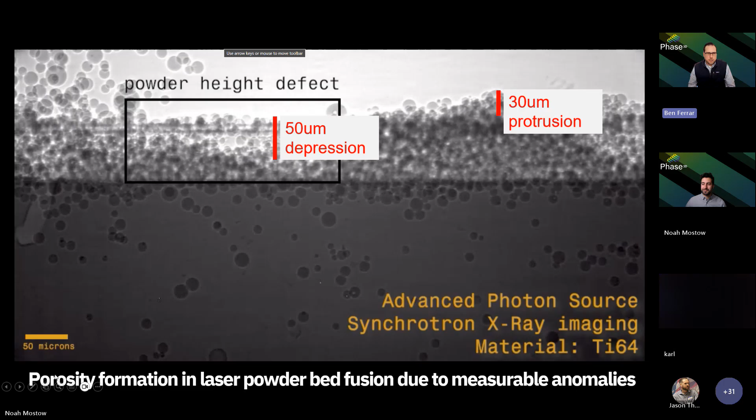So, when we look inside an AM machine, it's very easy. You don't need to play it again, Noah. You can click onto the next slide if you'd like. So when we look into an AM machine, it's very easy to see the laser moving, but you have to ask yourself the question, are we really seeing everything that's going on inside the build chamber?

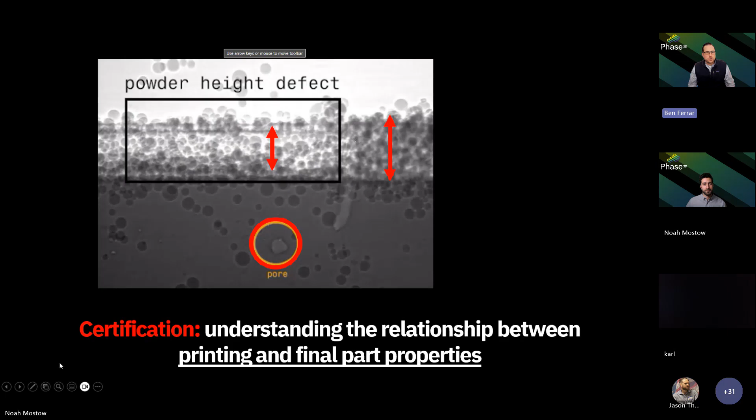And when an engineer sees either a part protruding out of the bed a tiny bit and it causing some small amount of streaking, what is the magnitude of that and what's the potential impact of it? And it's something that we've been working really hard on at Phase3D to really understand the relationship between what happens during the printing process and final part properties. So we'll discuss that in more detail as we go through the presentation today.

So firstly, let's take a big step back, right? If we think about where additive manufacturing is, and many of us that have been in the industry for a while have been saying it's in a pivotal phase, for what feels like a decade. But really, ultimately the applications that have won in the last 5 years and have fueled the start of the growth in production have been based on adoption of geometric freedom.

So a lot of heat exchangers or other cooling channels or fluid flow for aerospace and defense. And then in the medical industry, yes, we have the customization aspect, which has driven a lot of the growth, but also the unit cell structures that enable bone growth have really started to shape the growth. And you can see an image of an enlarged porous structure at the top.

And so when we ask ourselves the question, what do you need to be able to do during additive manufacturing to actually enable those really fine geometric structures and internal structures, you have to be able to ultimately validate what you've built, right? And so one of the things that we're really proud of our technology for is because we're taking measurements during the building cycle, we can actually validate that features have been built, measure features that are inside a structure that can't be measured any other way.

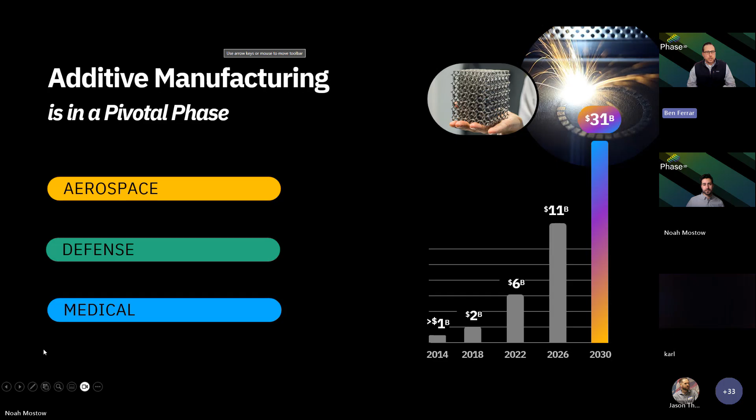And that's why we see so much CT scanning today in additive manufacturing for part validation. So we see this as the next step to unlocking the future in additive. If you want to move on, Noah.

So we talked a little bit about it from a geometric point of view, but let's think about it from a qualification or quality perspective. A lot of our customers today are seeing high scrap rates, and many of these things are caused by issues that are happening in the process that aren't necessarily repeatable build to build. So they might run a build once and they might see a certain number of anomalies in their layers or parts that start to flick up or protrude,

but really it's very, very hard for them to validate. And for us to make the big shift from the $6 billion market today to the production market in the future, we have to improve our quality standards. And to be able to do this, we have to be able to quantify what those standards are to get to production. I'm going to flick on. So, we see Phase3D's fringe inspection technology as critical in the future to enabling quality and ensuring reliability.

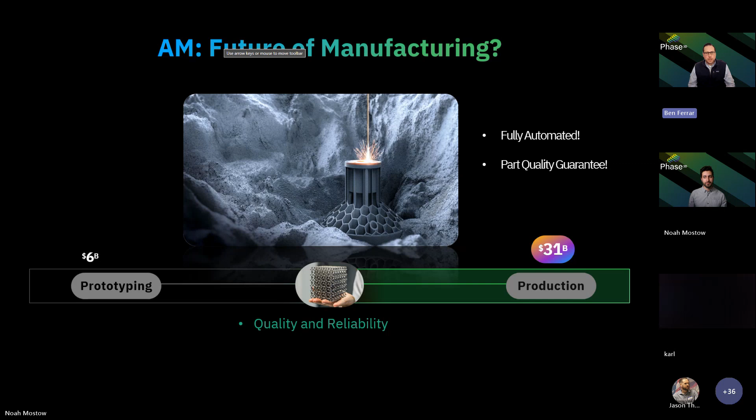When we think about how much data we take from a manufacturing process, today we're taking a huge amount of data before a build process and after a build process in terms of tensile bars, metallographic samples, and before we're doing a lot in terms of simulation and topology optimization on designs. But really the missing piece is what's going on in the build platform.

And there's a number of qualitative methods that are being used. People can look through images, but we see fringe inspection technology as being the first real method to quantify in process what's happening.

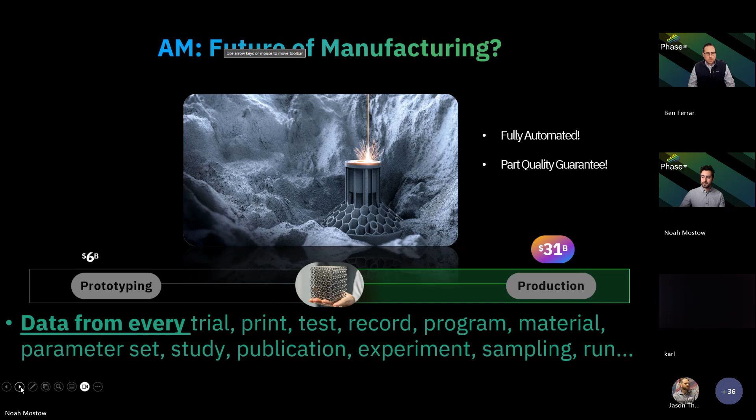So if we look at the cost of a build going wrong and you're not seeing it, and just to explain where we are today, right? Most OEMs who are manufacturing parts with a subcontractor or even internally will specify in their part spec that every layer of a build must be reviewed.

So you have all these engineers around the country and in these big print farms reviewing the most boring video of their life where they watch a build and they qualitatively say, oh, it looks like something's sticking up there, or it might be a streak, right? And ultimately then they have to get into a discussion. Okay, well, can we accept that, or is the part sticking up too far?

What this generally means is a lot of the time, they miss defects. So these things will happen during the printing process. The parts will continue on their route through a production facility, go through post-processing and inspection, which can be very expensive with heat treatments or HIPs or machining and post-inspections like CT scan.

And then when they get to the end of it, they have to restart the build because they've reviewed the movie, or they've eventually got to the point where they've figured out or agreed with their customer that the defect that they see is not acceptable.

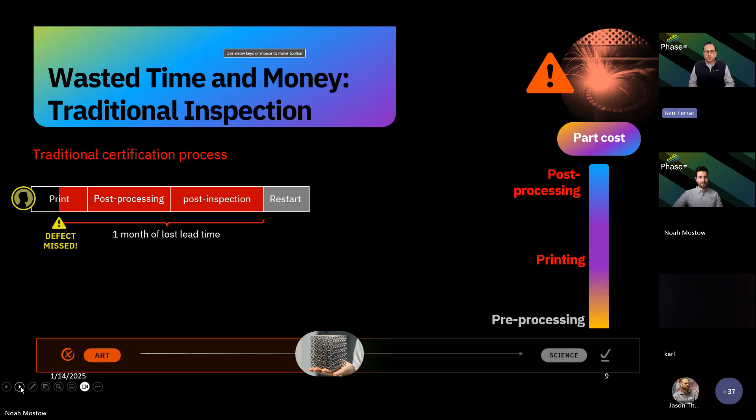What our technology allows is, during the build, because we're quantifying what's happening to the bed, our customers are able to set limits in terms of what they'll accept. So if they say, look, if there's a part sticking up over 200 microns, we know that we're not going to be able to accept this, so kill the build and restart. They save both the lead time and the cost, and these costs can be significant.

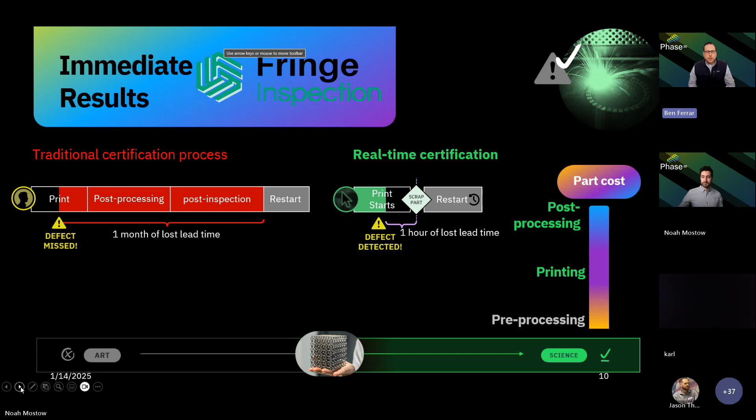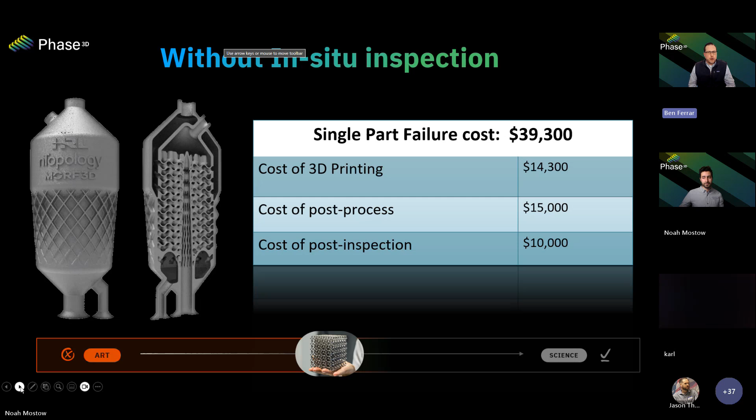So if you move on to the next slide, Noah, if we take a part like this example here, which is a heat exchanger, the 3D printing cost was about $14,000, and the total cost of post-processing and post-inspection was $25,000. So if you don't catch these defects or internal geometry issues early, you're liable for that cost. So with our technology, if you're able to save half the build time and all of that cost of post-processing, it's a significant improvement of COPQ, cost of poor quality.

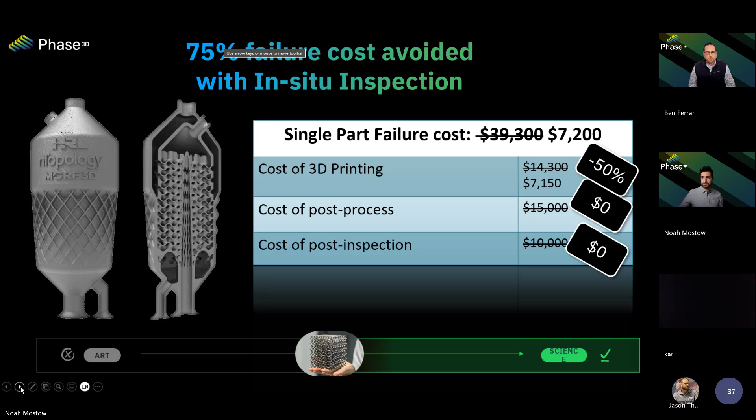Okay, so I talked briefly about all the information or data that we're gathering pre-print and what we're capturing post-print. And a lot of the data that we're capturing today during the print may be either really low resolution information or not really good leading indicators of what's happening in the process, things like oxygen content or temperature or other environmental conditions. But with our technology, we enable that quantifiable data to be created during the print.

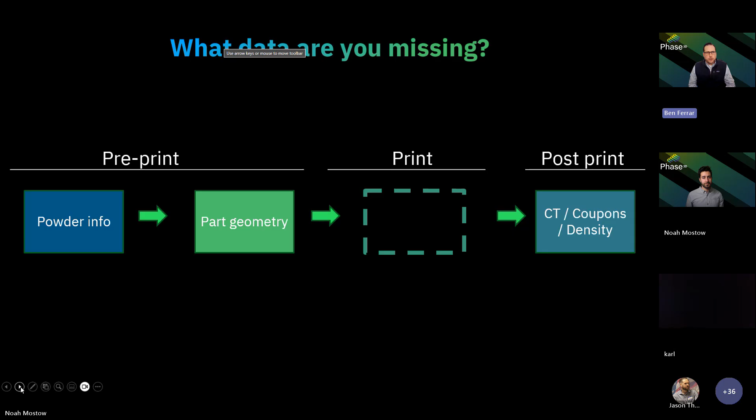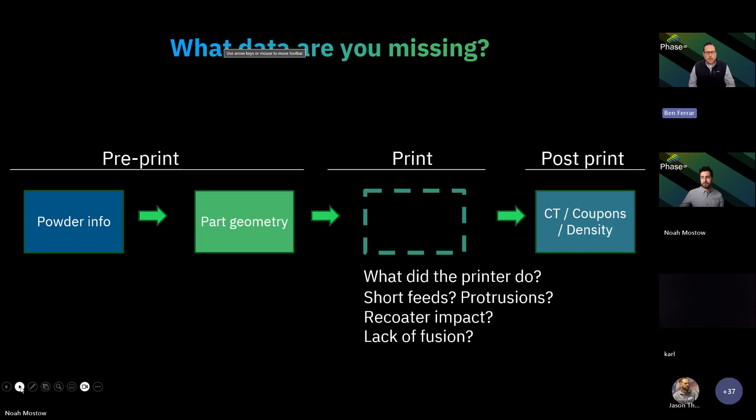So Noah, if you want to click on. So we can start to understand, okay, well, what did the printer do? Were there short feeds? Were there protrusions? Was there recoater impact? Was there any lack of fusion? All of which our technology has the capability to do in the future. It really becomes a question of resolution and time, right? How long do we want to take taking the measurement?

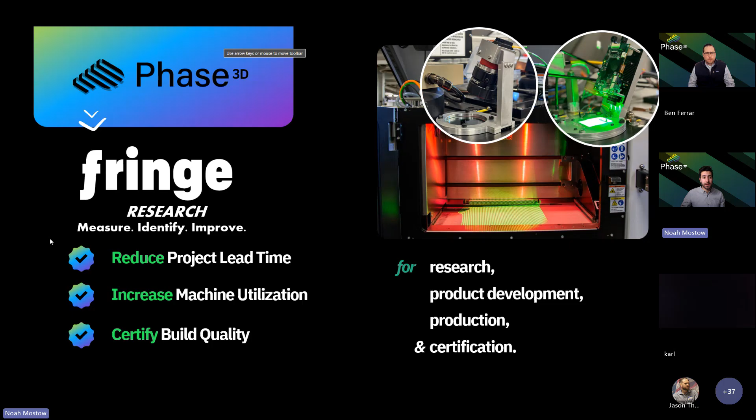So with that, I'll hand over to Noah to talk to you in a bit more detail about our products and how they work, and give you a demonstration of the software. Yeah, so thanks, Ben. Today I'm going to really focus on what we're doing and how this can impact you all within either your facility or the customers that you work with. I'm going to pass through those slides. Ben, I think those are still yours, but I think you covered all the topics.

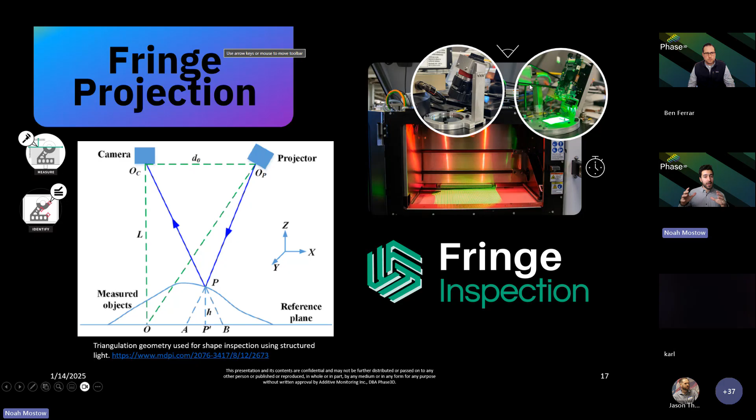So at Phase3D, our product, Fringe Inspection, really is based around fringe projection. Now, many of you today probably have seen 3D scanners, whether it's walking through your facility or walking through an event every single year. Our technology, Fringe Inspection, is based off of what is happening within the machine using fringe projection. So what we do is we mount a camera and a projector outside of the build chamber, and then within it, we're projecting a fringe pattern, which is basically a sinusoidal wave that identifies where there's a variation.

Now, we're not going to get into the mathematics of fringe projection today. If you are interested, I can send you a lot of really fun scientific papers about how our technology is working and the backbone to it. But what you need to know is basically how our eyes work. It's very similar. We have a distance between them, and what we're looking at is a variation. That's how we can tell depth. So our technology itself does this in really quick time for the entire build area.

So we can go into the math around how it's doing, but what you need to know is the camera and projector are working together, and then we have a calibration surface that is based during setup and then routinely updated so that everything is uniform. And what you're seeing here for this shape popping out, this is really what you can see. When you're looking into the build with a fringe pattern, you're able to see variations because we're making and controlling a line or wave. That is what allows us to take that measurement. And this is different than any other in-situ monitoring technology in the industry. And that's really why we consider ourselves inspection, because we're quantifying it.

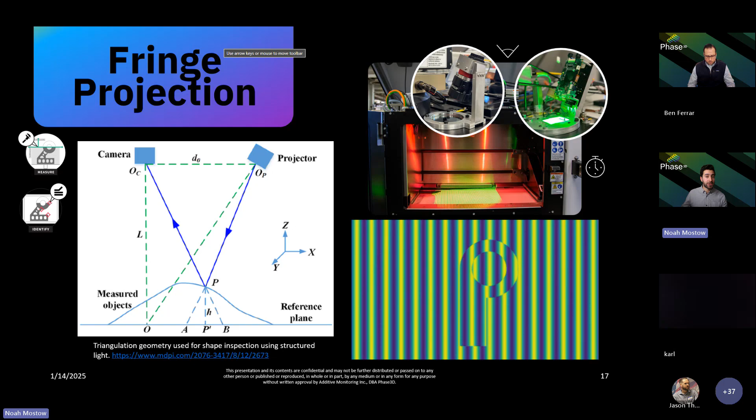So what does this mean? Now, many of you today probably have seen build images, or if you've looked into a metal 3D printer, it's a relatively flat surface. And what you're looking for in the visual spectrum is a shadow to identify a problem. This isn't good because really it's subjective. We can go back and forth all day and argue about what does this mean.

This is a hatch pattern, but is this something that we should fail the build for? What we do at Phase3D, and what our output is, is a height map. So every single pixel is a measurement and we're quantifying what's happening. So now we're able to create thresholds that cause build failure, and we're able to know and tell our customers what to do based off of a unit measurement.

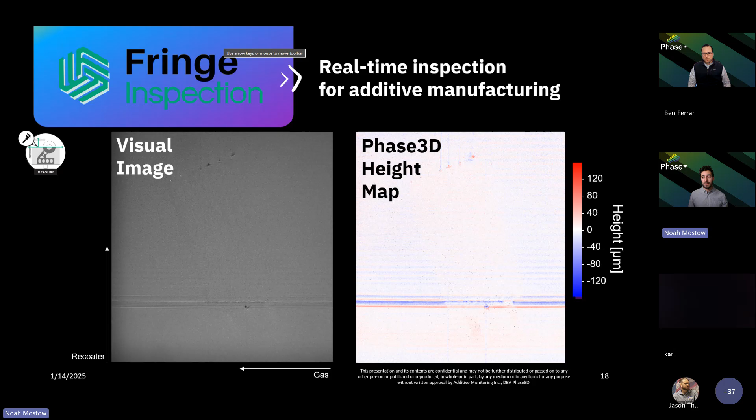Now today this can look like root cause analysis for build failure, which we'll get into, all the way into failing parts. In the future, where we see ourselves is a certification technology. Now this is because we're able to quantify. And even beyond that, our core technology has these kind of 5 pieces. So we're not using artificial intelligence or machine learning to identify these anomalies.

Now, many of you on this call probably have used ChatGPT or Claude or whatever AI model to write an email. That's great, but that's not an inspection technology. We can't trust a black box to say that this part is good because we don't really know what's happening. For my background, I'm an engineer. So I've created neural networks when I was at the Colorado School of Mines, and having created them, let me just say, you can't trust them completely.

And because we have that unit-based, repeatable, calibratable, known uncertainty measurement as the backbone to our technology, we're able to really understand what's happening and make decisions using really objective measurements. And this is where we differentiate ourselves from others in the industry, because you're not questioning, is this a protrusion of X amount out of the build? We know, and we can tell you why we know it.

So our technology, fringe inspection, takes 3 measurements per layer. So what does this look like really when you're running a build? We take a measurement after the powder is spread. We take a measurement after the powder is melted. And then we also take a measurement after the build area repositions itself. Now this allows us to quantify exactly how much powder is spread across your entire build area.

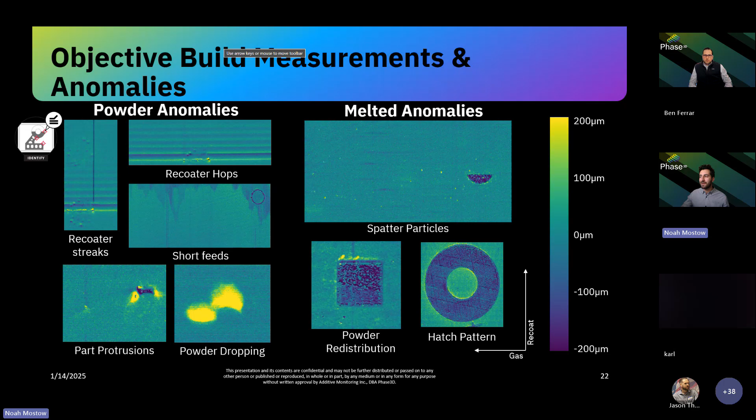But let's start to talk about what you actually do with this. So this slide here is telling you a little bit of a story. What we've done with our customers when they really adopt our technology is the goal here is to be able to stop a build. So what we'll run through is a design of experiments where we're printing parts that have anomalies that are going to impact the part, measuring the entire process as we've discussed, identifying what defect or flaw occurs within the part, and then we want to control the entire process.

Now, this is all dependent off of your specification. So whether you're looking at CT scanning or you want to be doing fatigue testing, tensile bar testing, this anomaly to defect is really that key challenge. So how do we correlate the two is some of the work that we're doing on a day-to-day basis to be able to understand what is really causing the part to fail.

Now, I'm going to be upfront with you. I would love to be able to say, this anomaly causes this part to fail inspection. But that's not how additive works. If you're printing bottle openers, you can have all the anomalies that you want. All that you care about is does it open the bottle at the end of the day? But if you're printing a part that's going on to an aircraft that's spinning, you have a lot higher specifications and even different specifications per region.

So that's where we can start to do this work and create different build profiles. And really what we're looking at here is improving the process based off of that profile. So what is a go, no-go criteria? Because at the end of the day, we're manufacturing. And this is a key piece to know: we can't be continuing to look at this as, I have 30 years of experience and can listen to the machine and know what's going wrong. No, we need to be quantifying. And that's what our technology is doing.

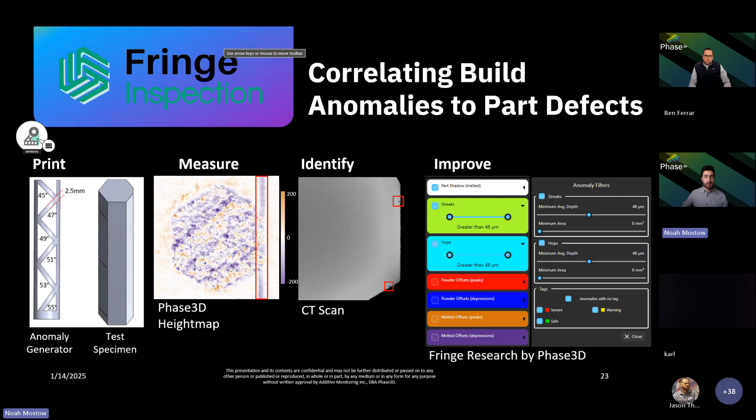So some of the work that we can publish here about these correlations is for the US Air Force, which was done on an EOS M290 using Ti-64, as well as for NASA using GRCop on an Colibrium Additive M2. Now you can see a high correlation for both of these studies from the anomalies to CT detected defects.

But also we were able to see that a 50 micron anomaly depression led to a pore that was detected in the part, which we need to continue to do additional studies on, and this is what we're doing with customers to know whether this is universal. We do see this at other customer sites, but for each different parameter set and material supplier, we want to make sure that everything is happening correctly.

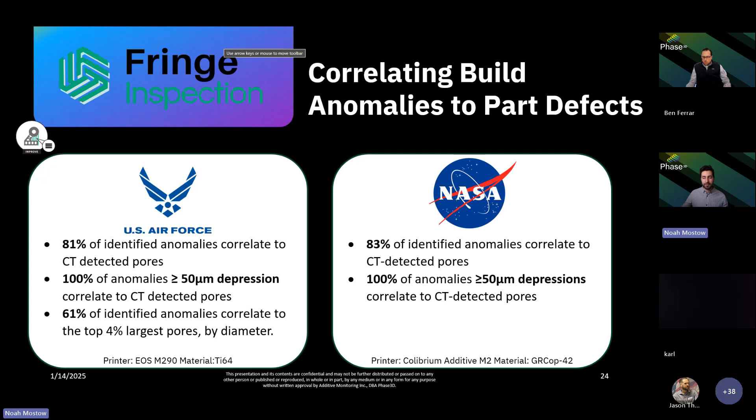We need, in our mind, to be able to have anyone who comes on site be able to run the machine, know when to stop it, and then be able to provide educated information on that part all the way through the process chain. And that's how we reach born certification, is by knowing what's happening in the machine itself.

Now I'm going to get into it in a second, but what I want to describe is our product suite. So Fringe Inspection is really what our product is, and it allows you to take the measurement. Then we have two options here. We can either get into Fringe Operator, which is your analysis and data visualization, which I'll show in a second. And then we have Fringe Qualification. This was released here at Formnext, and this is your high-level overview of the data that you're gathering at your facility to know what's going on.

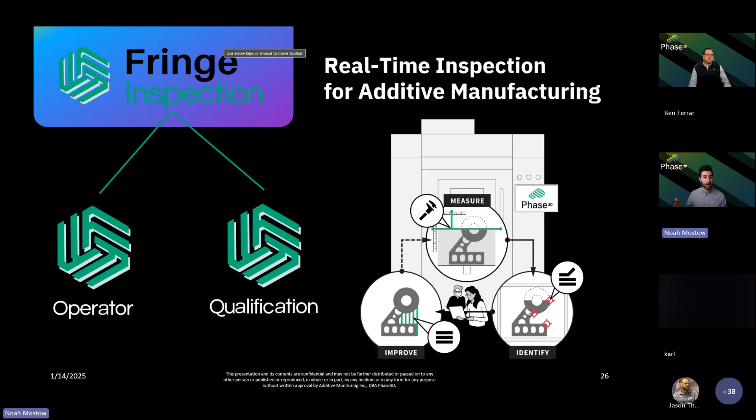Now, with all of this work, we can't forget to thank all of our partners. We've been working closely with the U.S. Air Force, Department of Energy, as well as NASA, as well as a bunch of private customers. But really, all of this work is being done to gather the information to continue to advance the industry itself.

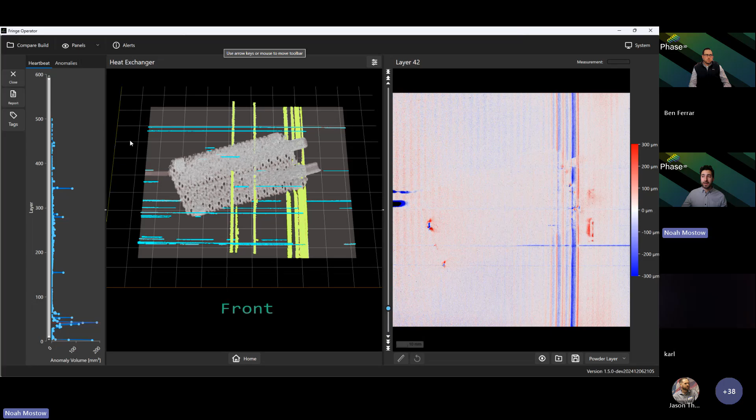The first one, what we call the heartbeat plot, the quality chart, we're looking at the volume of anomalies as the build grows. So you can see different peaks, what's occurring within it. I pulled up this large anomaly area that we can take a deep dive into. But also within this, you're looking at the anomalies in a table format. And this is important because you want to look at the biggest one first. Let's fail early so that we can know what's occurring.

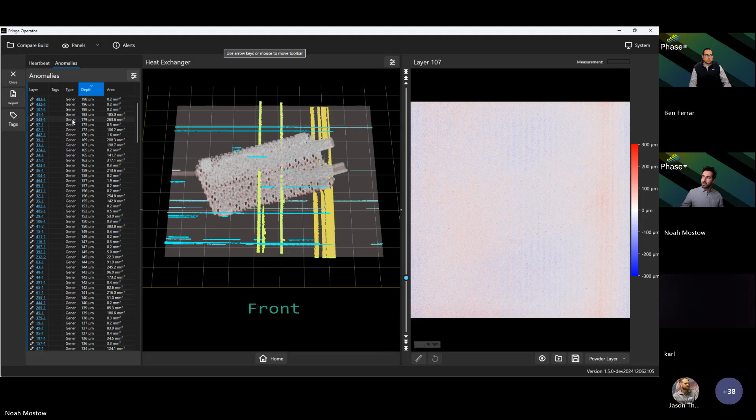So we can go exactly to a layer. Going to go to a layer with a different anomaly to know what's occurring. Weird. Let's go here. Oh, because they are small. So I'm just going to go back to the heartbeat. It's what I've been using the most. It's the easiest one for me to travel around in.

Looking through it, we also have a 3D visualization to understand what anomalies occur in real time, so these are streaks as well as hops automatically detected. We're continuing to grow these filters to be able to detect other anomalies as well. And then the final piece here is really that data analytics tool, 2D analysis to understand what's happening in real time. So as a notification or anomaly occurs that's greater than your threshold, you can go in and understand what is really happening in this layer.

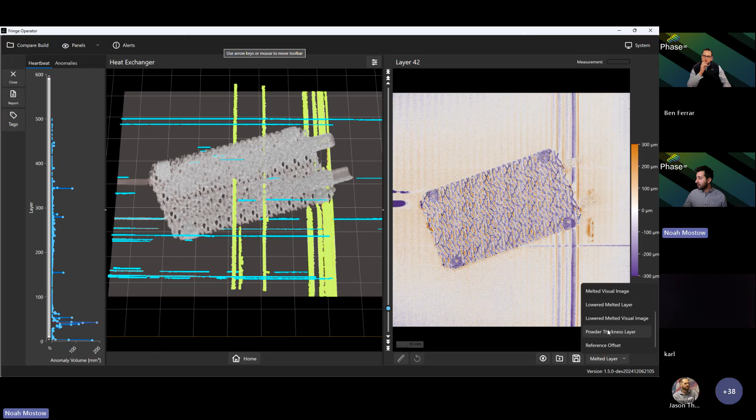So if we want to look at the powder layer, we can see what's happening, but we're also taking a melted measurement. And this is showing where the part is, what it's impacting. Maybe for this layer, this is just where support structures are. This isn't really going to impact anything. But we can also detect this short feed and quantify where it goes to the part itself, how it's getting impacted.

Now, a measurement that I always like to look at is powder layer thickness. This is quantifying exactly how much powder is spread across the area, as I mentioned before. So if we're looking here, we can see a lot of powder was spread across in this region. The part itself is a 30 micron layer build, and has up to almost 300 microns of powder over the part as it's being printed. We can look at short feeds and so on and so forth.

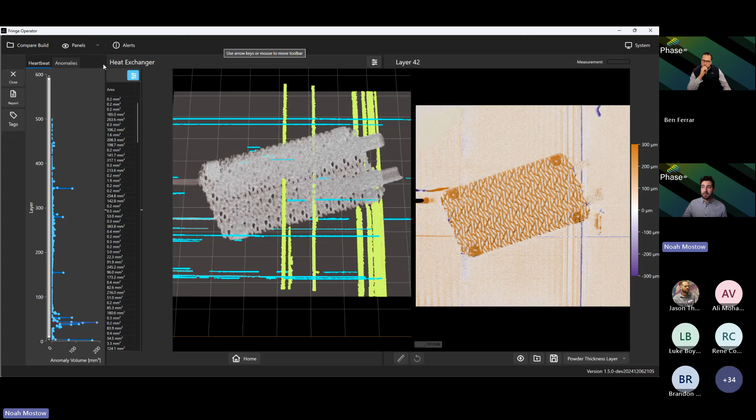Now, what this is allowing for is that identification of anomalies, but also that decision making as it goes. So what I showed before with the anomalies is as we're detecting recoater streaks, we can make different changes.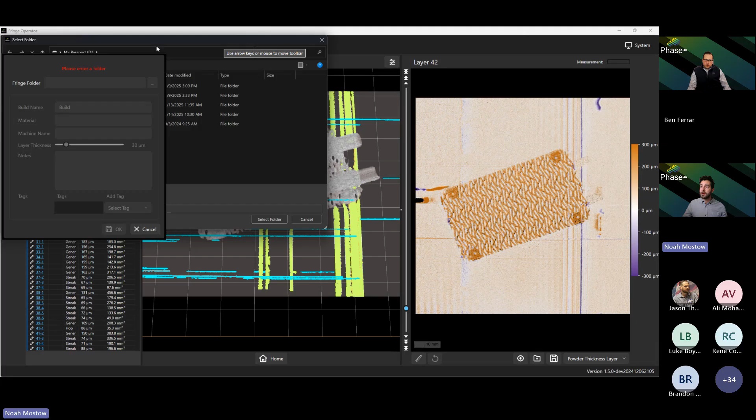Now, as we look at this, I want to make a really clear point. As you're measuring your build, you always want to look at what is your certification part, what went perfectly, or what happened in the last build and how does this change? So we do have the ability here to measure and identify different anomalies for different builds and compare them side by side. So this is our compare feature, where this is the same build on the same machine.

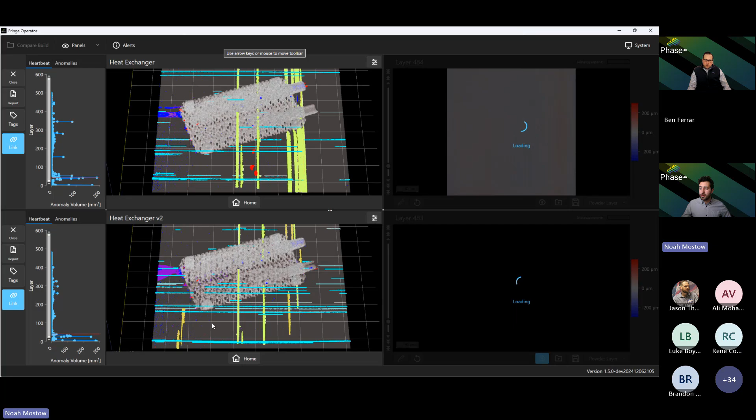And let's link these two together. So we're looking at the same things. So we're looking at the same build on the same machine where you're seeing different anomalies, different anomaly patterns, even if we wanted to go to a layer where in this part, there's some serious problems. We aren't really seeing an impact in this region as great as what was happening on the leading edge.

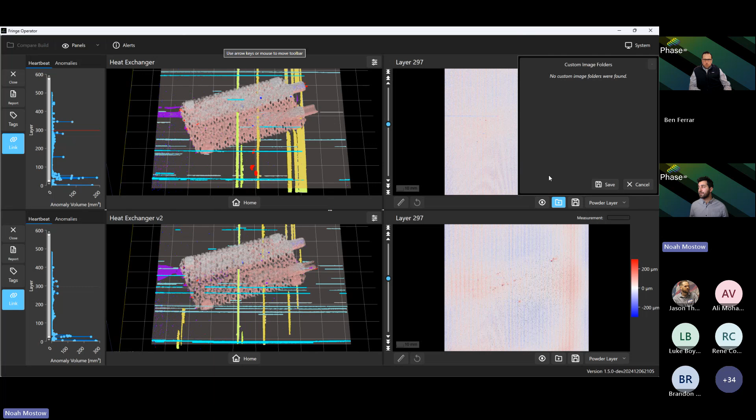And we can go through different examples here to see what was the problem within each region, and then what really happens as there is an impact or anomalies happening. This is what allows us to do quick comparison and quick analysis. The final piece to this, and I don't actually have any additional data loaded today, but we also have a feature that can add in any other data stream that you have. So if you have OT system, let's say for the EOS OT system, you can load in that data and compare them as a data stack.

We can also add in any additional data streams into Fringe Operator, and this allows us to get a full end picture. Some of this work is also downloading CT data, so you can run a quick analysis and a side-by-side comparison. Once you have it loaded in, there's just a reference measurement that you can then load it in. It's relatively easy.

One final piece to note before I kind of move to Fringe Qualification here is this is loaded in real time. So as you are gathering the data in the build, Fringe Operator is loading the latest data in real time. Everything is stored locally, so there's no up to the cloud. The data is processed locally as well as able to identify anomalies. So this really is what's changing the industry and for our customers to be able to know what's happening.

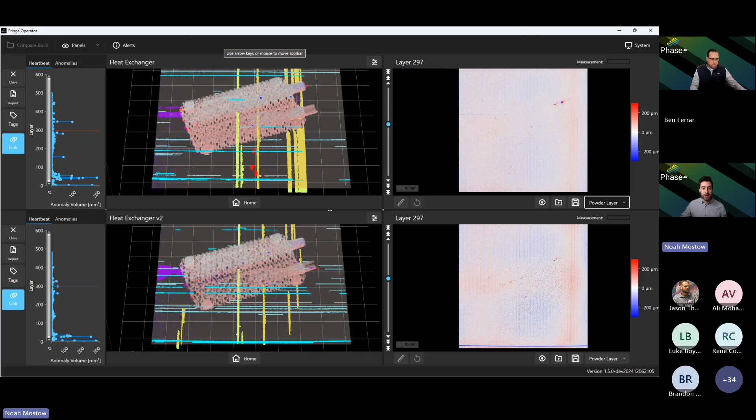Now let's take a step back and see what's happening really over trends. So we've developed and released Fringe Qualification. Fringe Qualification is a tool where you're able to understand from every single machine that you're gathering data on and trends over time. So here we're looking at a data set where you can see different trends as builds are failing more. You can then take a deeper dive analysis to see success rate, how it has changed over time,

looking at the anomalies over each build, as well as really what happens and what's the most important thing, how much money did you waste last year? This is a key piece for every single customer and everyone's management who wants to know how much money did I waste at the end of the day. Now, there are a lot of calculators built behind this to be able to quantify these figures, but what really it comes down to is the anomalies that passed or failed.

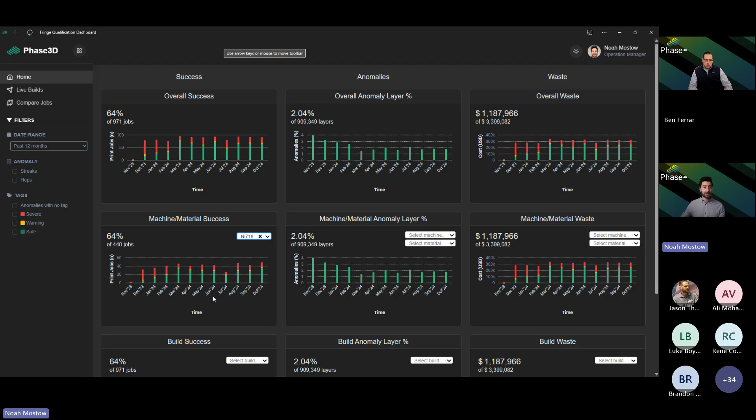Because if we really want to look, let's be realistic here, not every machine acts the same. So you can categorize it depending on the machine that you're running to be able to gather the data, see how the trends are. Maybe this machine needed new maintenance. Maybe it was the material itself, whether it's the Inconel, as it was growing, failure rates continued to change. This is critical so that you can really have that, hey, what happened over the last year? Let's look and understand from a high-level perspective.

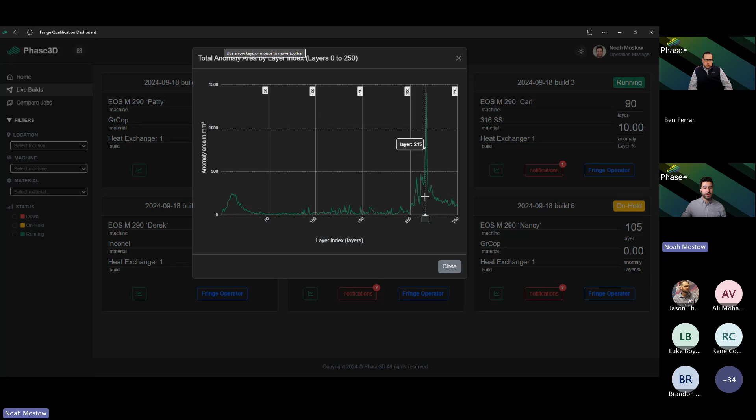We can also always dive into live builds, being able to understand and see the heartbeat chart for what's occurring as the anomalies or thresholds change. And this is what allows you to make those decisions from a high level. This is a tool that we see as being able to be on a screen at a manufacturing site so you can know what's happening. And then, as we kind of said, take a deeper dive into Fringe Operator for your engineers who know the technology well.

And the final piece here is, once we take an understanding of what's happening in the build, let's look at trends over time, still comparing them from one machine to another and tracking pass or fail criteria. This tool is really that part of your process so that you can understand what's happening over the entire value stream for your technology.